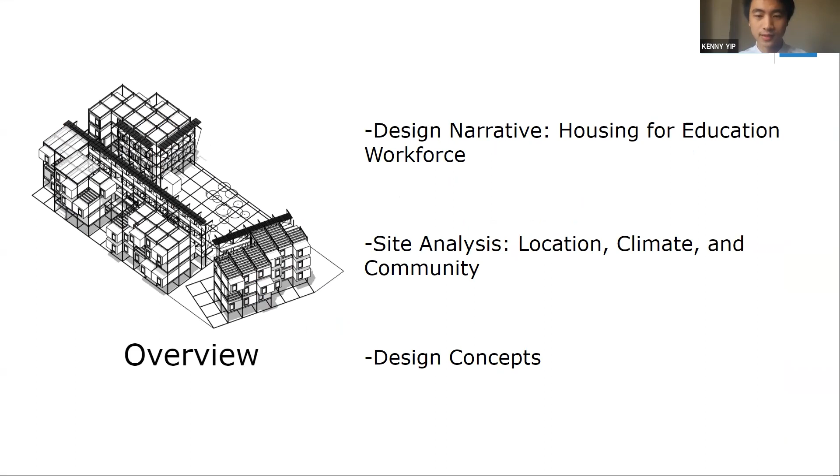Thank you very much. Hello everyone, we're UCLA Bruin Builders, and we are here to present our design proposal of Hollenbeck Village, located in the neighborhood of Boyle Heights, East Los Angeles. My name is Kenny, and here with me today are 4 other members of the team: Laura and Connor from architecture, and Sterling and Luca from the engineering team. We'll begin our presentation with an introduction of our design narratives, what drives our design, and transition into some of the site specifics, then conclude with aspects of the design that reflect the criteria outlined by the competition.

Some of the design goals we focused on for this project are shown here. We want this multifamily building to be affordable and bring together members of the community with attractive spaces. We want to achieve net zero with on-site renewable generation while also electrifying our technical systems. A modular approach gives simplified variability to the types of families that can live at Hollenbeck Village, and incorporating a passive design reduces energy use while taking advantage of the temperate Los Angeles climate.

In September of 2022, the governor of California signed AB 2295, the Education Workforce Housing Assembly Bill, which aims to build below market housing for teachers and other school employees on public school land. Thus, we chose an empty lot on the school grounds of Hollenbeck Middle School to develop our project. The lot is also located south of 2 other high schools and a continuation school, allowing our proposal to serve a larger pool of students, teachers, and school employees.

Guiding our design strategies in both the realm of architecture and engineering are the 2022 California Building Energy Efficiency Standards. We aimed, however, not to use these as simply guides, but to surpass them throughout our design.

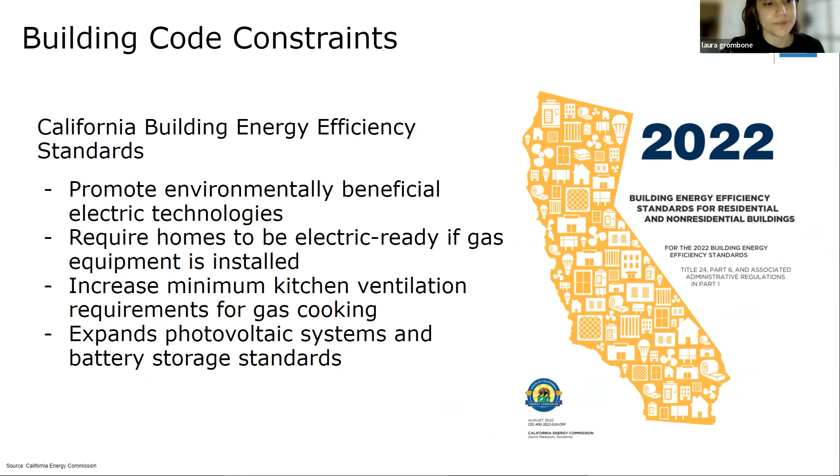So I want to take a moment to talk about our site analysis. We're located in a Mediterranean climate, so year-round we have a pretty consistent temperature. You can think of us as having a dry season and a wet season with a low yearly rainfall. We have an average humidity of about 60%.

Next, we're going to dive into some deeper details about our design concepts, starting with market analysis. After conducting a market analysis, we concluded that Boyle Heights is a predominantly low-income renter Latino neighborhood located east of downtown Los Angeles. Like most underprivileged neighborhoods in Los Angeles, Boyle Heights suffers from a chronic lack of affordable housing and access to green spaces. This is one of the reasons why housing affordability was a driving element in our design process.

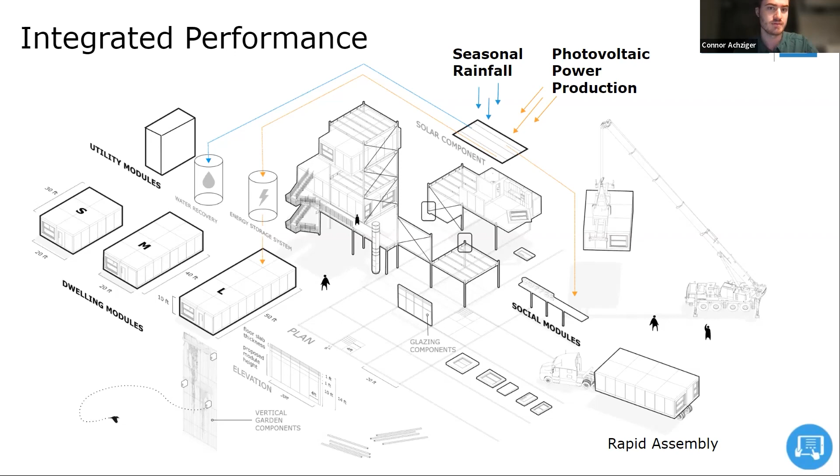Each of the 3 modules has 2 main components: a breezeway for passive cooling, which is consequential of 2 opposing large windows, and a utility corridor. Through this partial floor plan, we hope to highlight the way the modules can be combined, mirrored, and rotated for the optimization of shared plumbing walls.

As Connor discussed, we oriented our buildings to maximize the passive energy gains. We oriented towards the prevailing winds and put space between our modules and chose our window positions to enhance the cross ventilation, reducing cooling loads in the summer and the associated energy costs. The east to west modular orientation also takes advantage of natural lighting and passive heating in the cooler months.

We specified Energy Star certified appliances to conserve water and energy, and a decentralized HVAC system, giving occupants control over their own indoor temperatures. The modern open plan floor plan creates a luxurious feel and integrates the indoor and outdoor with each of the units.

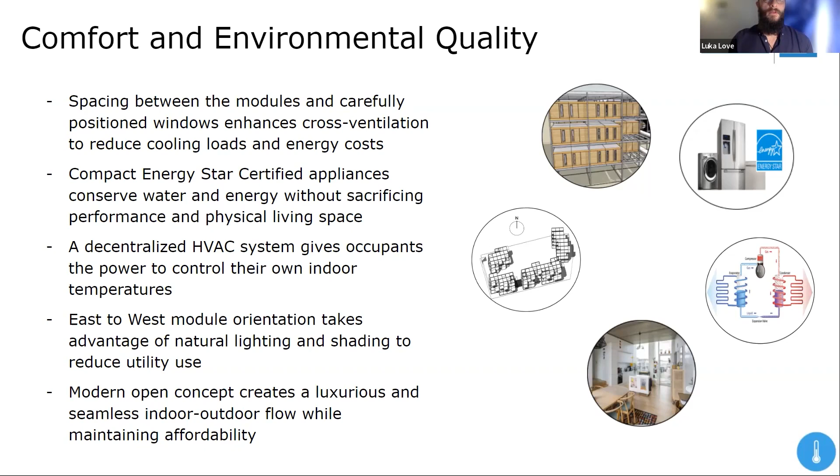Our primary building envelope material we chose was a 5-ply cross-laminated timber. We chose that for its sustainability and for its insulative properties. And on either side of that, a number of other layers of waterproofing and insulation to ensure a safe and secure building envelope that would remain relatively insulated throughout the year.

The primary structure is a structural steel framework, which each of these modules sits into, giving some flexibility in the orientation of the modules and how they're set up within the framework. We chose a variable refrigerant flow HVAC system that is able to serve multiple units, for the ease of access for maintenance down the line.

As Luca mentioned, there's a lot of flexibility in how we orient our modules. This allows us to position them in a way where upper units are shading the lower units during the summertime, but allowing solar heat gain in the winter when the sun is lower on the horizon.

We have a plan here to implement 40,000 square feet of drought-tolerant indigenous plants to support local pollinators and also increase biophilia. Here on this diagram as well, you can see we are collecting gray water through our sinks and showers, and we're collecting site water through our photovoltaics as well.

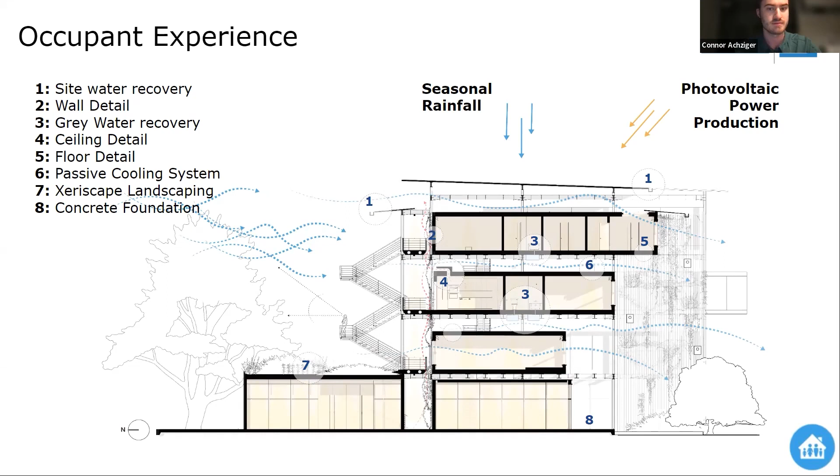Using PV Watts, we calculated the annual renewable energy production for a solar panel configuration that fully covers the rooftops of each block in the complex. Based on our preliminary open studio model, we have an estimated site EUI of just under 16 kBTUs per square foot. This suggests that for the total energy consumption of the building, we are achieving a net zero design, but it's worth mentioning that we're still working to introduce key technical components into our energy model.

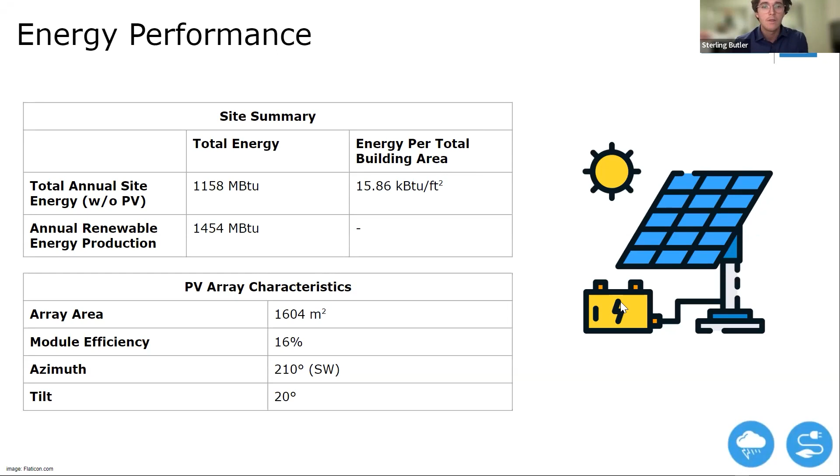This brings us to some of our goals ahead of the final submission. We want to create a more detailed energy model that not only incorporates our designed HVAC systems, but we also want to explore additional energy efficiency measures that optimize the building operations.

We're interested in utilizing battery storage in conjunction with on-site solar power, and we're still exploring the cost benefit and feasibility of other storage mechanisms outside of the conventional lithium-ion battery. In this context, battery storage can not only add resiliency to the community at Hollenbeck Village, but also to the nearby education facilities that may be relied on in the face of emergency or natural disaster.

We've made design decisions for the main mechanical, electrical, and plumbing equipment and fixtures. Going forward, we want to better understand how those utilities are distributed and how the different trades work with one another. With some of this additional detail, we want to revisit our life cycle assessment to include a more refined list of building components and materials, and also discuss alternatives to those that contain high embodied carbon. Lastly, we plan to continue iterating on the design as a whole and search for more inspiration within the team and hopefully industry sponsors in the future.

And with that, thank you for your time, and we're open to any comments or questions that you have now.

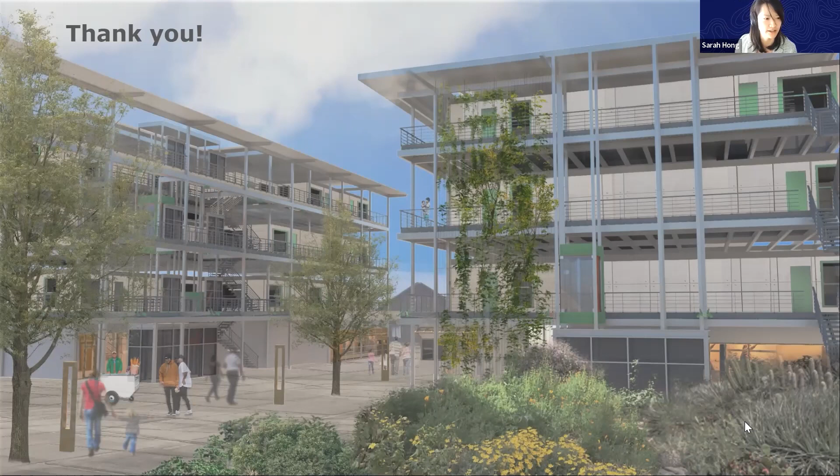Thank you for that. This project looks great. Your design goals are spot on. The project addresses a lot of critical issues that we're seeing today with affordable housing, walkability, it's community centered. I think that's great. It's also the rainwater capture is really important in a place like LA. The VRF system is also, I think, very appropriate for this climate. I have a couple of questions. One, I noticed the utility costs, even though you are in a very mild climate with a great system, the utility costs did seem a little bit high. Did you do an analysis of that?

Is most of that coming from plug loads or? Yeah, so the majority of that estimation was just based on the yearly energy consumption of some of the equipment itself. We still haven't, within our energy model, had the opportunity to introduce utility estimation costs from the area because we're still working on gathering that information, but that is something that we want to look to minimize with these energy efficiency measures that we are implementing.

Gotcha. Thanks. My second question is, were any climate risks considered in your design, either with the envelope or with the mechanical systems, particularly the risk of wildfire pollutants in the area and the impact on indoor air quality?

So the main risks that we were focusing on, at least initially, was the fact that the LA area lies pretty close to some large fault lines. Our structural system is designed to resist any severe earthquakes that may occur in the area, and with the building envelope, we do want to explore how we can also apply some type of fire rating to important systems, maybe on the ground floor, and also provide safe ways for our building occupants to get out of the area if they need to in time of fire. But that is definitely something we want to look at further. We also have that large grey water repository, which we have access to in the event of fires.

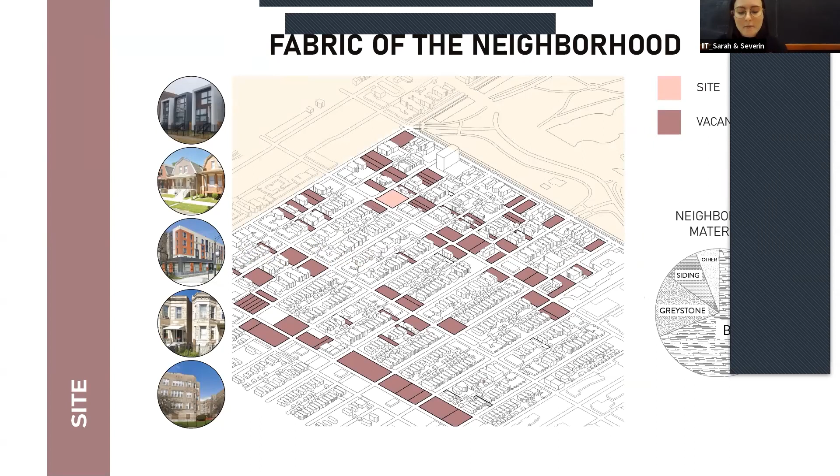At the beginning of the design process, we learned that our community stakeholders really want residential developments to feel inviting and familiar within the fabric of the neighborhood. So we studied the local architecture and found that most of the homes have a brick finish, and a common element is a bay window.

In its current state, our site is vacant and surrounded by a handful of vacant lots, and these vacancies interrupt residential and commercial streets. Knowing this, our design needs to reintegrate our site and surrounding vacant lots into the fabric of the neighborhood.

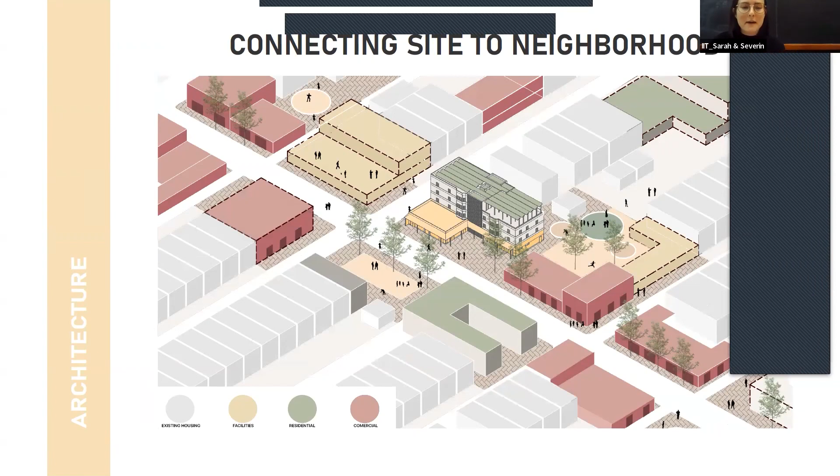Our proposal acts as a catalyst in reviving the 61st Street commercial corridor through the creation of pedestrian-friendly public spaces. As can be seen in the massing diagram, by pushing the residential floors away from the street, more space can be allocated for commercial program that activates the street.

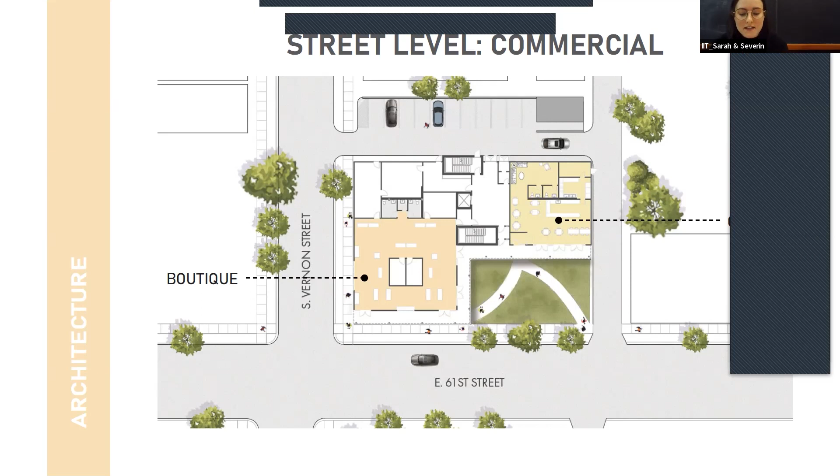As can be seen on the ground floor plan, the courtyard invites the public into the boutiques and the cafe. These commercial spaces also generate profit for the building, which is used to help lower costs and make it more affordable for residents who own homes within the building.

The residential floors feature two different types of units, owned and rented. The 3-bedroom and 2-bedroom units are owned, while the 1-bedroom units are rented. We designed these so that adjacent units can be merged into a 4-bedroom home if owners wish to expand.

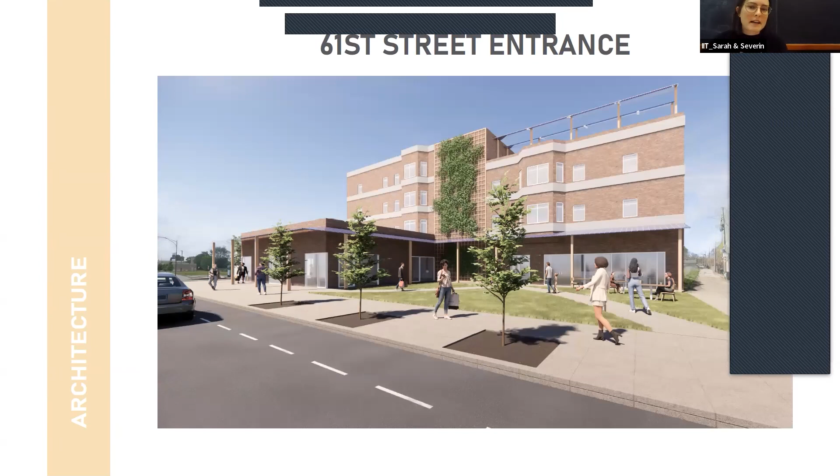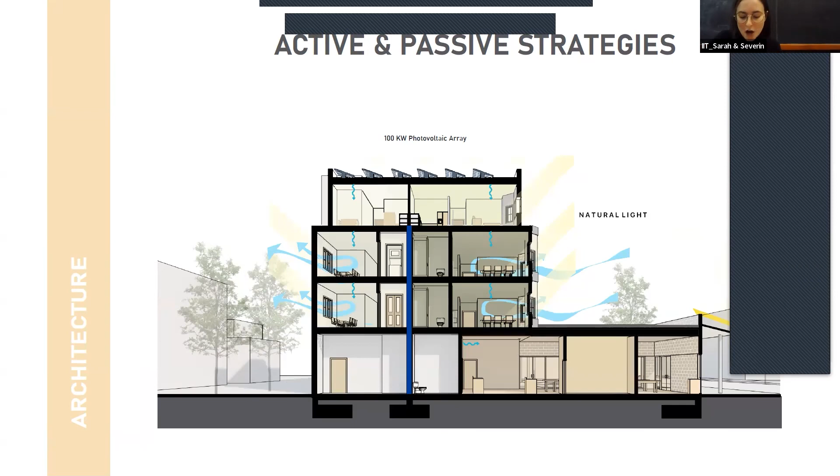Before we get into the energy analysis, we wanted to highlight the passive strategies that our building implements. Because we are located in a heating-dominated zone, our building is oriented along the east-west axis to maximize solar exposure and take advantage of natural daylighting. To minimize heat loss, our envelope is airtight, and additionally, each residential unit has operable windows and fans that can be used for thermal comfort.

Awesome, thank you very much, Sarah. My name is Severin. I'm going to be sharing our energy and engineering side of our project.

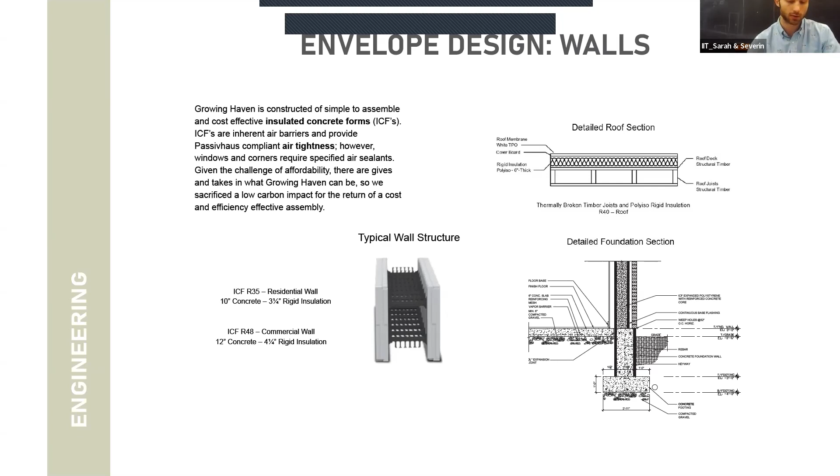Going through our envelope design, to accomplish our energy and affordability goals, we recognized that a sacrifice needed to be made somewhere. By accepting a lower LCA and avoiding a thermally broken wooden frame system, we opted for an insulated concrete form structure with low impact carbon concrete. This allows for an affordable construction method, a high quality insulated enclosure, and fewer zones where air leakage problems may occur.

For our residential HVAC and plumbing, the spaces are conditioned by roof mounted VRF systems and a dedicated outdoor air unit. The system is affordable and minimizes losses through short refrigerant lines. Additionally, heat pump hot water heaters are stored at each floor lobby to minimize sound transmission and maximize space use. For our commercial spaces, we primarily require our MEP systems to be running on a 12/7 schedule.

Given limited use and individual space needs, controllable wall-mounted ductless mini split air conditioners are provided throughout so that individual zones can be accommodated on an as-needed basis. Water heating supply is provided from a heat pump system with storage tanks located behind the boutique spaces. Additionally, the cafe kitchen hot water supply is provided by a SANCO2 tank and a heat pump system, which provides inherent cooling within the kitchen space and an ample amount of hot water supply.

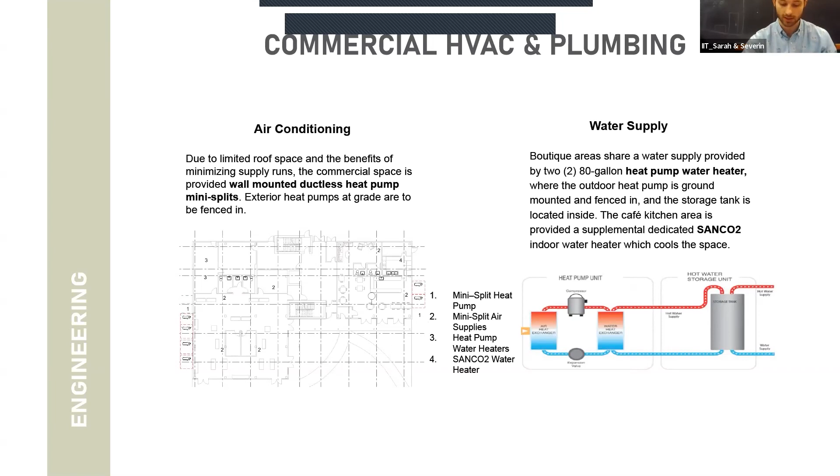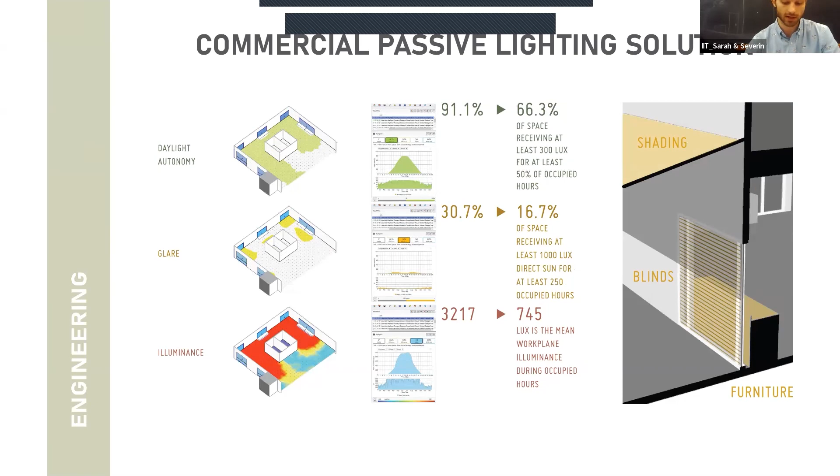Moving on to our PV system, there will be a 230 panel, 440 watt solar array, and a 100 kilowatt system. Each AC panel is fitted with a microinverter, allowing for decreased shading losses due to debris. The panels will be mounted on a fixed ballast system at a 30-degree angle facing south. Ideally, this system should produce close to 500 million BTU per year.

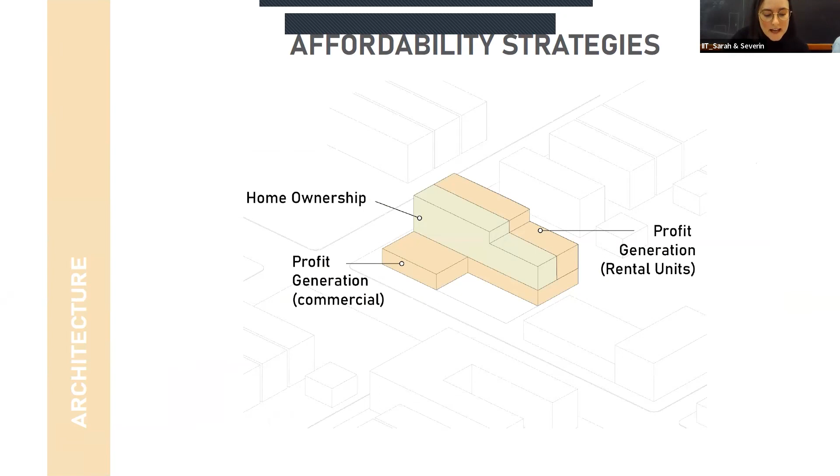Thank you, Severin. After our preliminary cost analysis, we found that we needed to implement additional strategies to make Growing Haven both net zero and affordable. Therefore, to offset the upfront construction cost, we created two affordability strategies. One strategy is that homeowners could purchase a rental unit on their floor and use it to generate income. The other strategy is to utilize the commercial boutique and cafe spaces to generate profit that will offset the maintenance cost for the entire building.

Additionally, we researched multiple grants, rebates, and subsidies, which can be a good option to help lower initial construction costs. Thank you so much for listening, and we'd like to thank our excellent teammates, industry partners, and wonderful faculty advisors.

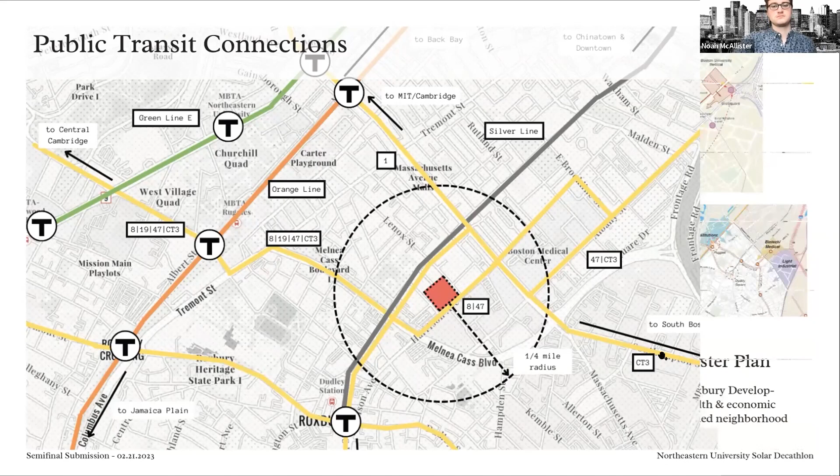Our site is broken down into 3 large residential blocks, as well as a cluster of townhomes. To start with, our east building, along with its residential space, also has retail commercial space, common areas for the residents, and a large expansion for Rosie's Place, which is the oldest women's shelter in the country, with both its administrative and operations located just adjacent to our site.

Our north building is our most dense residential building. It consists of mainly studio and 1-bedroom apartments, and it is an all residential building.

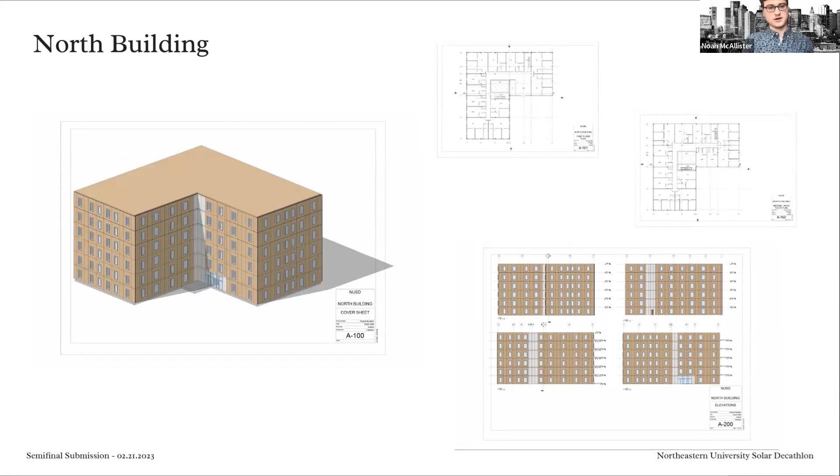Our west building is home to our largest commercial retail space. It also contains covered parking, a gym for the residents, and a green roof.

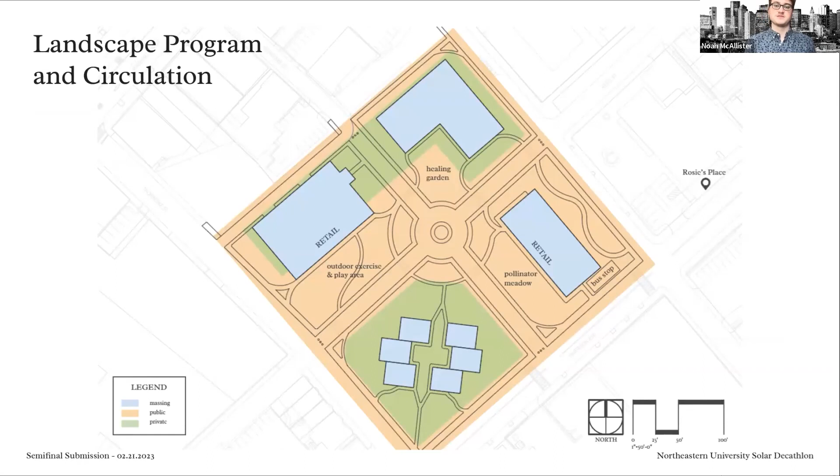One key design concern that was identified was trying to find and maintain a balance between private and public use of the site. This was done through the general layout of the massing, as well as specifically curated program for the site itself.

Going into more detail about our buildings, starting from the outside in, our facade is a rainscreen cladding system using 2 different materials, one being an Equitone fiber cement panel, the other being a charred white cypress wood panel.

Working with RDH Building Science, we've been trying to perfect our building enclosure to make sure it's not only energy efficient, but also easily constructible and free of any headaches on the general contractor's end. We've adopted a modular EIFS wall panel system with a 3-ply CLT backup wall, as well as a semi-permeable and semi-rigid insulation, which allows water to outwardly dry.

We also have a proper air and water barrier. We hope that this system is not only easily constructible for installation, but it also avoids any potential water penetration of the CLT members in the construction process.

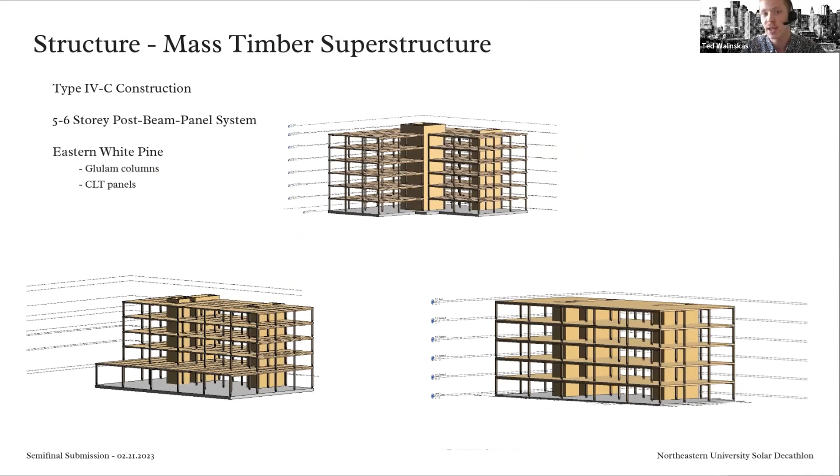For our structural systems, we are using a post beam and panel system for our 3 main buildings, along with general wood framing on our south townhomes. This system allows us to buy all of our structural members in bulk, and with the post and beam system, we are allowed to have various spans of various lengths to match our different unit sizes, as well as our modular wall panels themselves.

For the MEP systems, there were several selections made to promote energy efficiency. Our main criteria for selection were energy efficiency, durability, and price, respectively. To start, an important selection came with the HVAC systems. We are planning on using metered heat exchangers along with heat recovery ventilation to ensure that efficient and effective heating will be supplied to the building.

For our electrical systems, we are observing several incentives such as Mass Save and Clean Peaks, given by Eversource and the state of Massachusetts, respectively, to promote load reduction on the grid by buying energy back from on-site production. With this design, we will be connecting all of our buildings with a virtual power plant.

All 4 of our buildings will have on-site solar production and storage of at least 10 kilowatt hours per unit, and will be connected through SPAN smart panels. Each of these buildings will be connected so as to reduce the reliance on the grid, along with being able to sell back power to the grid as production goes beyond demand.

To create the most energy efficient envelope, several design iterations have been worked through. We began with the box model and have been working through energy models along with different design iterations to create an efficient envelope. We are still working through this process.

Due to an unfortunate error in our submissions, our carbon emissions and utility costs were overlooked. The total carbon emissions for these 3 buildings would be 319 tons per year. This number was generated using the nationwide average of 0.818 pounds of carbon per kilowatt hour.

This number would be much lower as further energy efficiency is implemented, on-site storage is accounted for, and the true emissions of energy pulled from the grid are accounted for.

The total utility cost for this building per month would be at maximum $10,500. This value would be greatly reduced as the energy model is refined, energy buyback is completely accounted for, and the aforementioned incentives are applied.

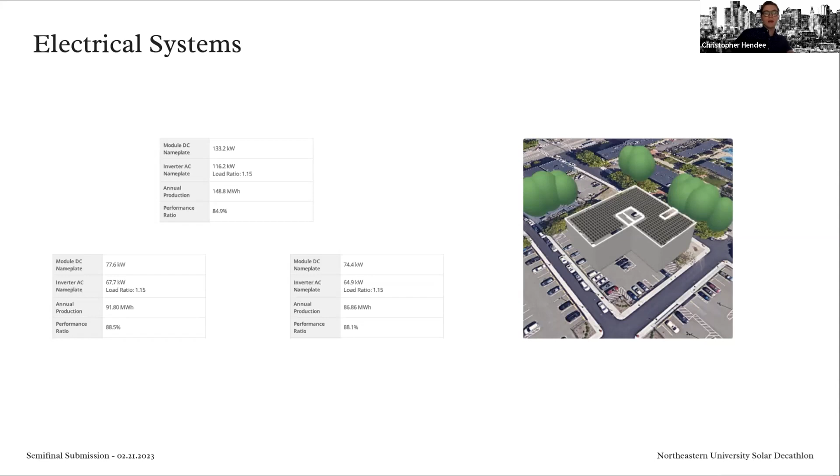With respect to the plumbing systems, we have decided to use tanked electric water heaters along with thermodrain heat recovery. With the use of thermodrain heat recovery, it is predicted that under conservative estimates, it will reduce the load on each hot water heater by 25%. All of our fixture selections were made with reduced water use in mind.

As mentioned, our site is also home to a collection of townhomes. There will be a total of 18 3-bedroom units in these homes, designed with the young family in mind. This will create a family-oriented community within the larger Cardinal Plaza community and the neighborhood of Roxbury. The more precise plans and layout of these units are still in development.

If you talk to any developer in Boston, you know that it's hard for things to be approved, which is why it was a priority for us to actually design something that could be built in the city. Because our site is so large, encompassing multiple streets, we would be in what's known as a planned development area, or a PDA. We've already started considering how this PDA would be approved by the city, and additionally, what review elements were considered for each individual building.

For our north building, as it's over 50,000 square feet, it would go into Article 80B, known as intensive large project review. This has additional measures we have to consider, such as being LEED Gold and meeting 1.25-inch stormwater retention.

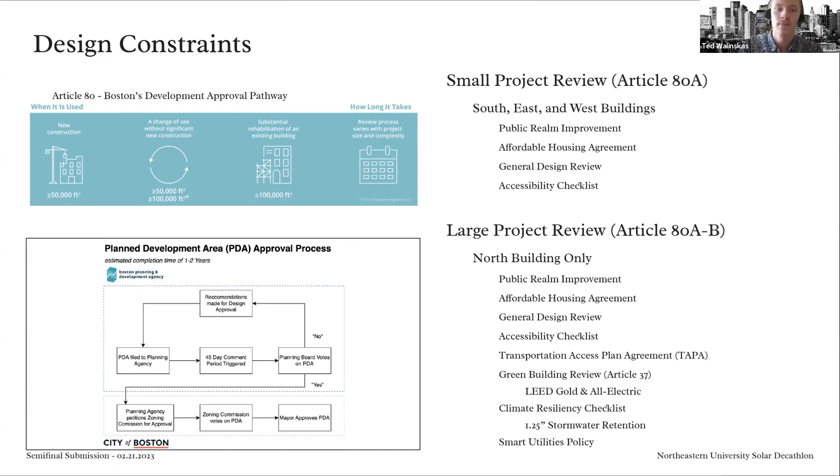It's also no secret that Boston is expensive, recently surpassing San Francisco to be America's 2nd most expensive city to rent 1-beds, studios, and most general unit combinations in. Using our own experiences from our ongoing build competition, we were able to create an in-house tool to compare and analyze different affordability ranges for our site.

For our north building, we have a dense array of studio and 1-beds being sold at market rate. And using the surplus we have from the sellback, we were able to subsidize our east and west buildings with a large amount of affordable units, all the way down to 30 and 50 percent of the area median income, which can be considered deeply affordable.

This is able to supply a lot of market rate units for the booming population of young professionals, particularly in the biotech and medical spaces, while also supplying units for the long queue of longtime residents in the city who need these income restricted housing stock.

We've had a large change in design in the past month, but now what we're working on, we believe, is a strong foundation for our project. We'll be moving forward to perfect it and add more detail on all the different categories.

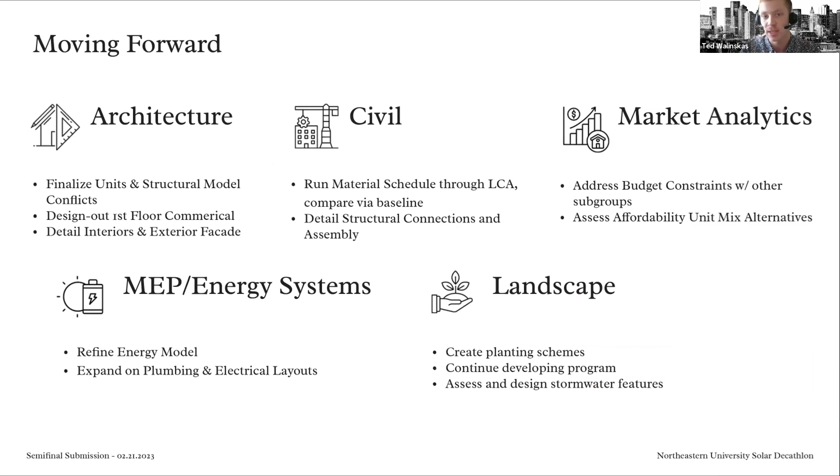Thank you, guys. Can you tell me more about what you're doing for the HVAC design? What's your system selection for space heating and cooling? So for our systems, we are planning on using air source heat pumps. We've been looking into the Lennox systems, primarily due to their performance with cold climates.

Great. And then for the domestic hot water, you mentioned drain heat recovery. I think that's great. Is this being paired with a gas or an electric water heater? Electric water heater. Gotcha.

I really like the analysis about the market, but tell me a little more about the demographic of the market for this project. Yes, so our neighborhood is really dynamic. It is a very dense neighborhood. We're on the verge of South End and Roxbury, and specifically, there is a large working class population. There is a lot of public housing around our neighborhood, as well as general market rate brownstones. So there's a large class disparity within the neighborhood, which is why we need a lot more of what's considered the missing middle in Boston. And in particular, on the higher end of that missing middle, we need more basic, smaller studios and one-beds to meet the growing student population in the area. We have our university nearby, as well as Boston Medical Center, which has a lot of medical students and students on residency who aren't able to afford a lot of these really high-end luxury developments around the hospital.

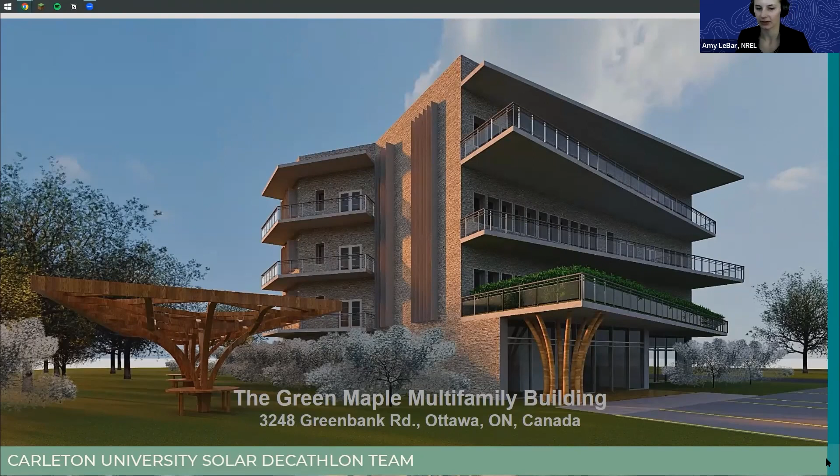Okay, good morning. I'm Isaac. Ali, Ilyas, are you here too? Yep, I'm here. Sounds good, audio is clear.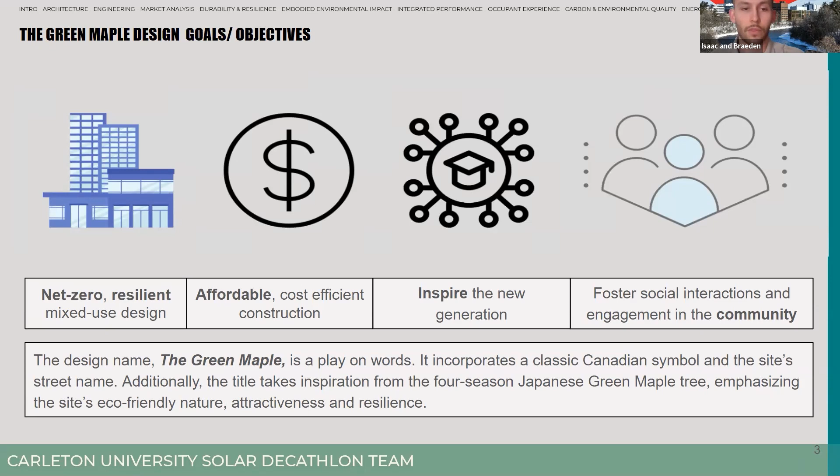Our third goal was to inspire the next generation of developers. Through our research, we didn't find much in the way of developers demonstrating effective long-term net zero construction, so we want to change that in the community. And lastly, we wanted to create and foster community interactions through social engagement and safe environments.

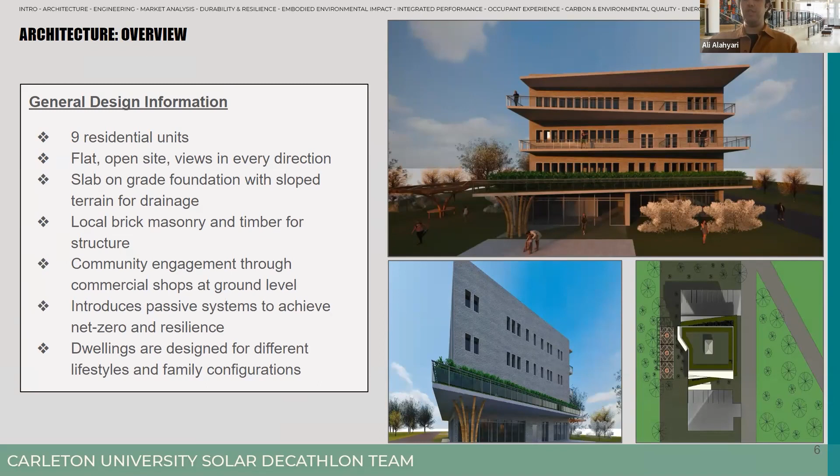For the architecture, based on our design goals, we went through different design iterations to find the best possible form, layout, and materials. As you can see from the figures, the site is a flat, open site with views in every direction. Local brick masonry and timber will be used for the structure. Passive systems such as side fins, rainwater collectors, and ground source heat pumps were all introduced to achieve net zero and resiliency, which will be explained further in the presentation.

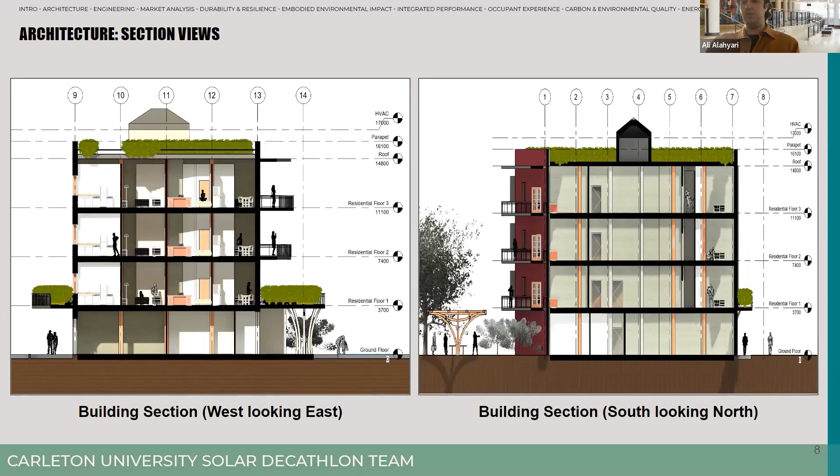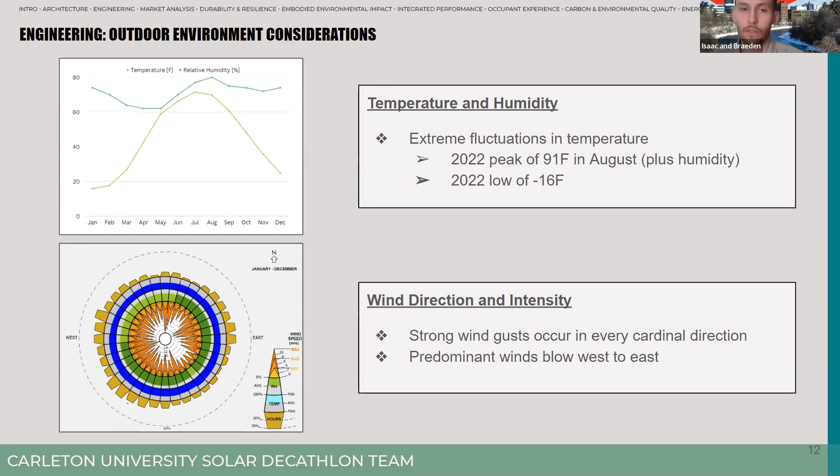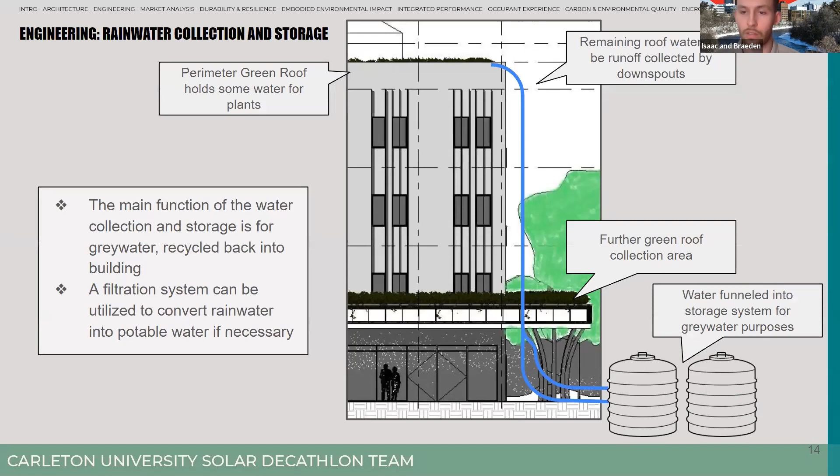Another design solution we considered was the rainwater collection system. A portion of the water is absorbed into the green roof, but the remaining runoff is collected into cisterns that can be used for gray water systems, such as toilets. In the case of a power outage, filters can be utilized to convert this gray water into potable water for drinking or showering.

For the market analysis, we calculated an initial investment of $8.7 million, broken down into 4 phases: site and construction, PV and mechanical systems, exterior and interior finishes.

We found an affordable rent price of $2,500 based on the average median household income. We also took an average commercial lease for the Barrhaven area at $52 per square foot. As a rule of thumb, 1% of the property value was used for the annual operating and maintenance costs. With this data, we got a payback period for the initial investment of 29 years.

For durability and resilience, we modeled the building's energy systems for the most energy-intensive week of the year. We designed the system, in the event of a power outage, to have enough battery storage while charging and discharging with photovoltaics to be resilient over the course of that week.

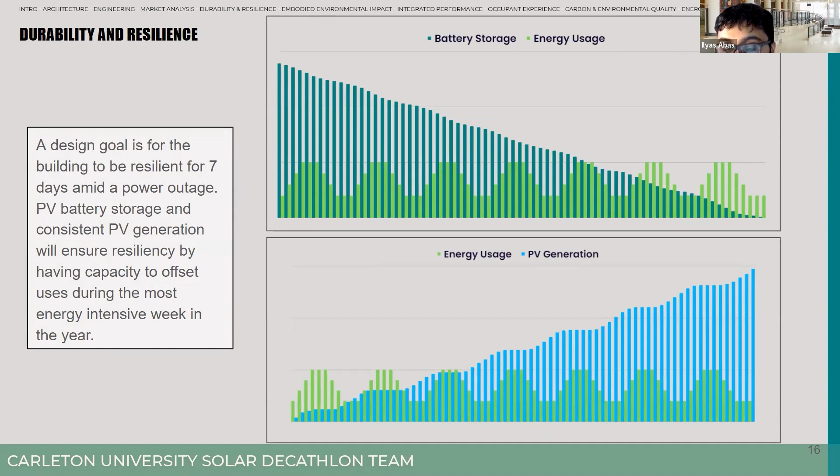For embodied environmental impacts, we focused on wood frame construction, locally sourced masonry bricks, no use of natural gas, and an on-site renewable energy system.

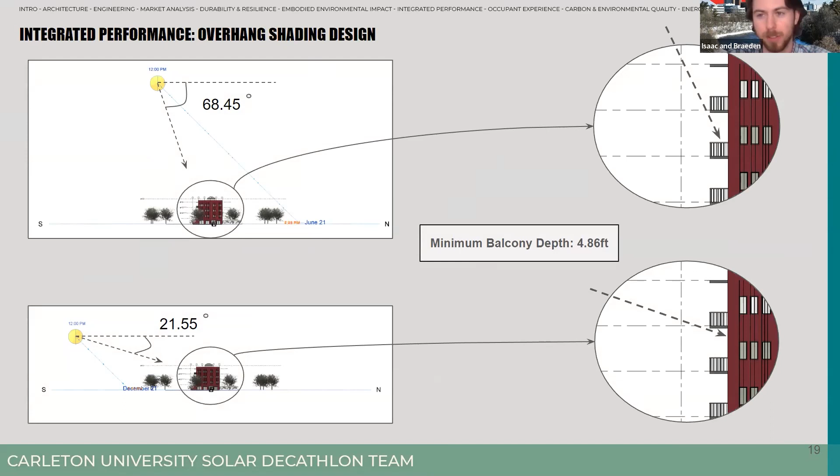Based on the Ottawa latitude, overhangs were designed to completely shade south-facing windows in the summer and allow all solar heat gains in the winter. Side fins were incorporated on the east and west facades of the building. They ensure that there's shade after 10 a.m. in the east and until 2 p.m. in the west.

As far as pleasing occupants goes, there's lots of green space in the surrounding area. Bedrooms are distant from elevators, so disruptions won't occur. Living rooms are all on the south facade of the building, meaning more sun is provided to the occupants. Stairwells are designed to ensure proper egress.

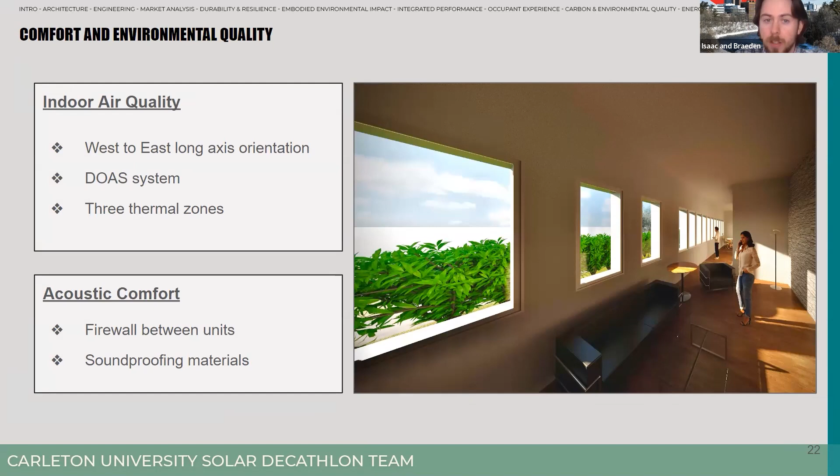A main comfort design of the building was to include the 4 categories of indoor environmental quality, which incorporates extraordinary indoor air quality, provides acoustic comfort through soundproofing, and overhangs and side fins provide visual comfort to the occupant. Since Ottawa is in an extreme climate, excellent thermal resistance is provided, as well as operable windows in the summertime, giving occupants a sense of control which ultimately makes them more satisfied.

The energy modeling process began with software such as eQuest, then Energy Plus, which eventually moved to Design Builder, which is where we found our successful results.

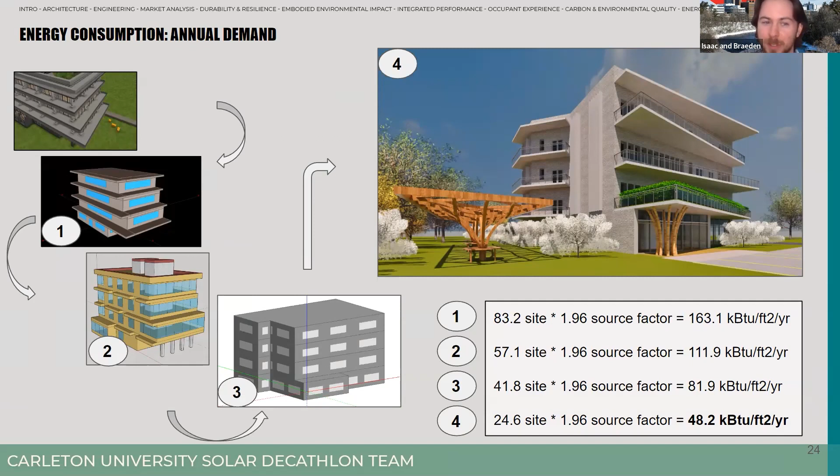Using an applicable site-to-source factor for electricity for the region, an energy usage of 48.2 kBtu per square foot per year was found, which is less than the solar decathlon requirement.

As said before, we're in a predominantly heating climate, so roughly 60% of the energy use goes to space heating. PV generation is more than sufficient to counter the energy uses for 8 months of the year, in which the extra energy will be sent back to the grid.

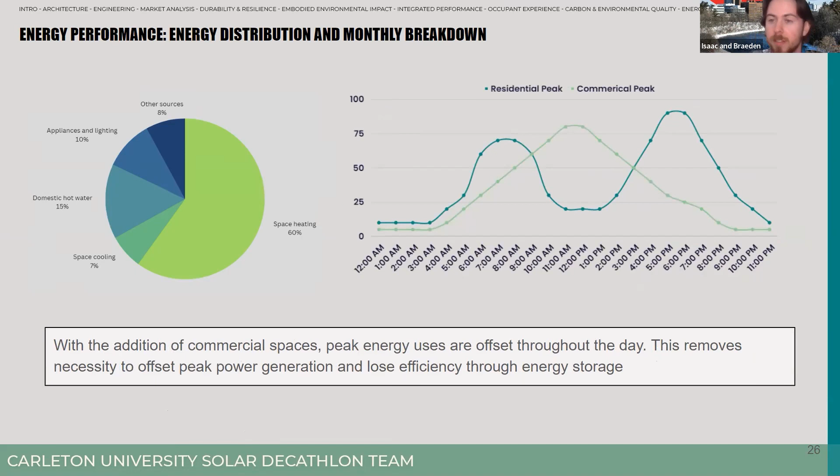For 4 months, though, in the colder, more energy-intensive months, it'll be required that electricity be used from the grid. With the addition of commercial space on the first floor, peak energy times can be offset to limit efficiency losses through energy storage. We want to thank you for your time and ask if you have any questions.

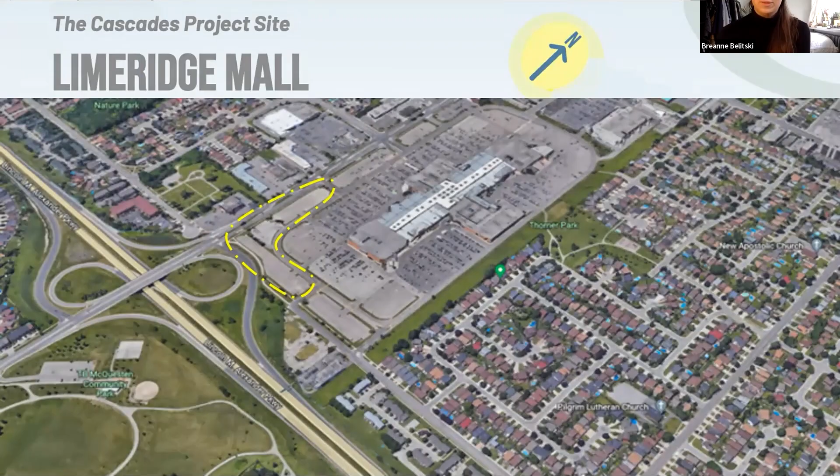Our building, dubbed the Cascades, references the waterfalls of Hamilton by utilizing stepped architecture that cascades downwards towards the south, thereby allowing maximum daylighting into the units. The building is crowned with a wave of hybrid solar thermal panels, which offers benefits from its equatorial orientation and generates as much power as the building requires.

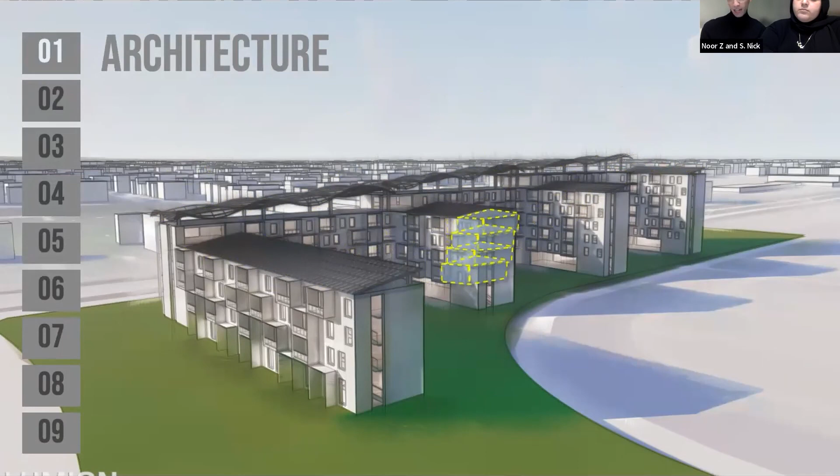The units are designed as modular and prefabricated, which offers many benefits, one of which being a unique scalability of our design for many lot sizes. Lastly, the courtyards and breezeways offer spaces for play, relaxation, and community connection.

The Cascades energy strategy is to provide a high-performance envelope that reduces thermal energy transfer and air infiltration through the walls, roof, floor, and windows. The envelope will be detailed to reduce thermal bridging and allow high R-value assemblies, such as R32.5 effective walls. This will ensure that occupants of the Cascades will be comfortable in Hamilton's cold climate.

A hybrid solar thermal panel array at the roof level of the building will provide all heating, domestic hot water, and electrical demand for the Cascades residents, generating a potential of 454 kilowatts of on-site electrical power. The low TEDI approach allows us to utilize highly efficient mechanical equipment, such as the solar thermal panels distributed by a radiant floor heating system, cooling provided by an air-to-water heat pump tied to in-suite fan coil units, all powered by on-site renewable electricity. Prefabrication of the modular units will minimize construction duration, reduce waste, and provide high-quality control.

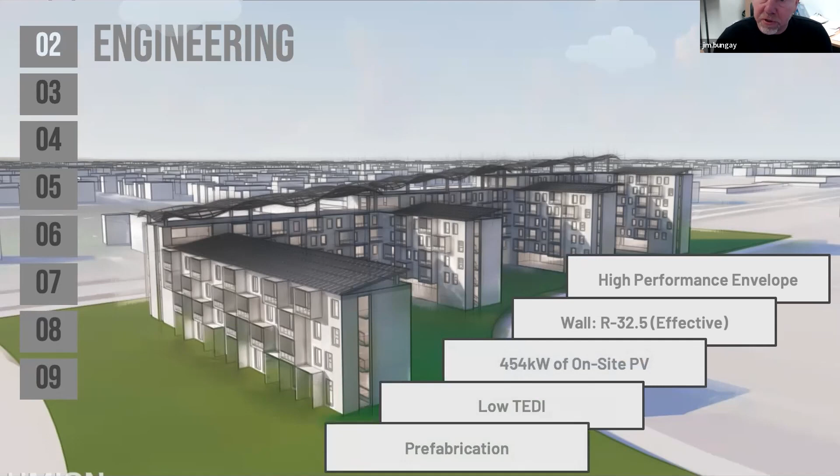The goal of the Cascades development is to provide affordable and high-performance housing to a maximum number of people. Our model is a cooperative housing complex that aims to set rates which align with median incomes for the area. The unit costing is based on actual construction costs rather than a market-driven value.

Occupants in the typical market-driven housing spend higher percentages of their income on housing utilities, resulting in less available income for savings, food, etc. Our model provides affordability with a high-performance envelope, so occupants of the Cascades spend less of their income on housing utilities, leaving more available for discretionary savings and spending.

Several strategies act to ensure the durability of materials and systems that go into the Cascades. Materials used in construction will be chosen for their longevity, with a service life to match the age of the building. A WUFI hygrothermal analysis will ensure long-term durability of the building envelope. Passive design strategies and on-site electric storage will ensure occupant comfort during short-term power losses. Water collection and storage will ensure water security and reduce reliance on the municipal systems.

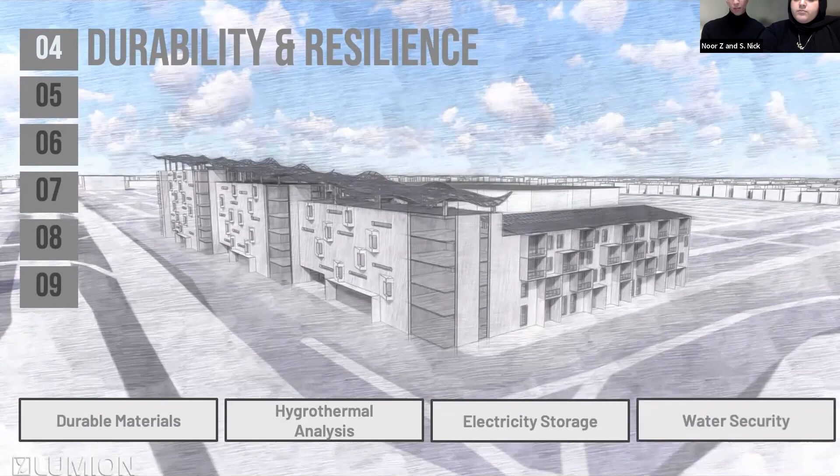Our approach to reducing embodied carbon at the Cascades begins with modular construction. Modularity and manufacturing offsite increases build quality, reduces waste, increases on-site construction efficiency, all leading to a reduced embodied carbon impact. Each module will be constructed of mass timber elements and clad with fiberboard insulation, which each have significantly reduced embodied carbon as compared to their traditional steel, concrete, and XPS counterparts. These products also have the added benefit of sequestering carbon for the lifespan of the building.

Where concrete is required, high supplementary cementitious materials, fiber reinforcement, or high recycled content rebar, and 50+ day cure times will be employed. The Cascades will make use of recycled content to the furthest extent possible and will be zero carbon certified through the CAGBC.

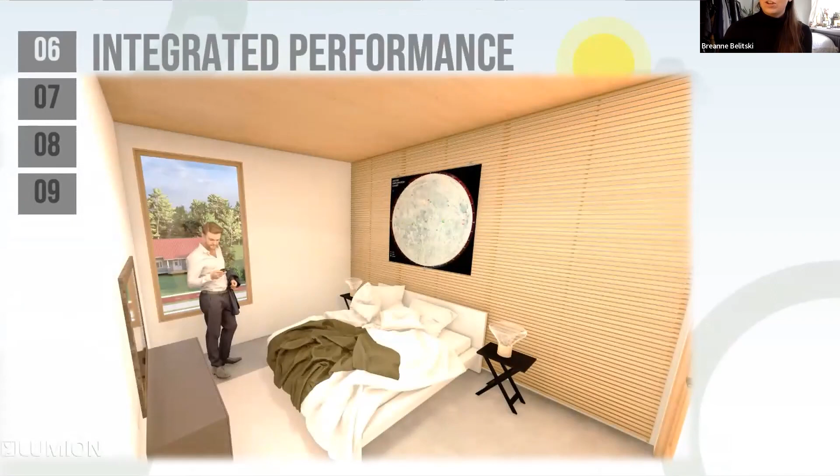In addition to the physical systems which contribute to energy efficiency, community-oriented technologies such as smartphone apps and smart touchscreens will inform residents of the energy performance of the building. Access to this information will involve the occupants in the Net Zero initiative, which will contribute to energy demand reduction.

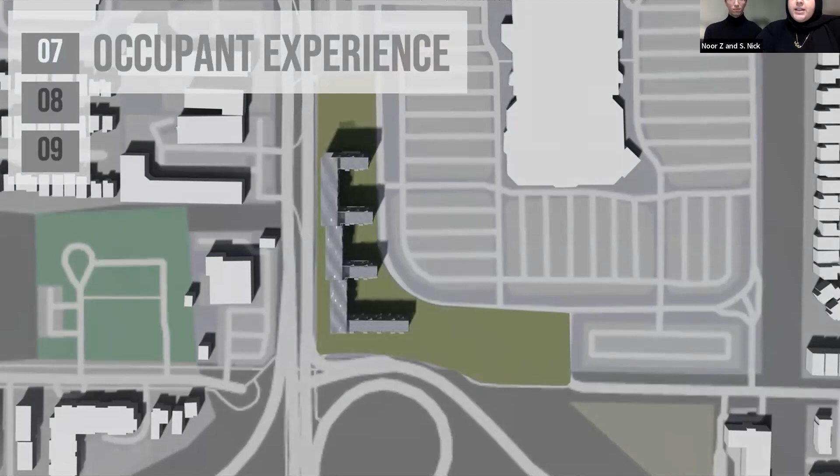In each unit, natural materials, functional layouts, and interior daylighting will improve the occupant experience at the Cascades. But now we want to go beyond the unit itself and tell you about the building's shared spaces in connection to the wider community.

Our building is designed for anyone who needs affordable housing. Rooftop patios, indoor amenities, and breezeways and courtyards offer space for families to play, individuals to meet and relax, and encourages connections with neighbors.

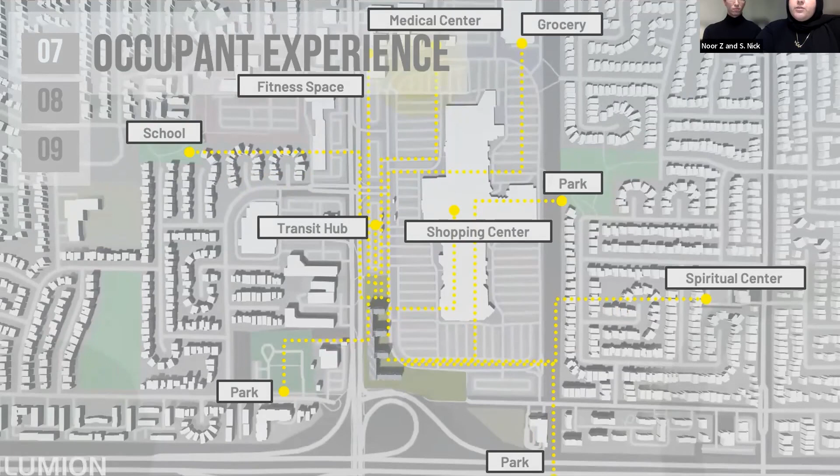Located in an already developed area, the site is well connected to the larger community. Transit routes, grocery stores, medical centers, gyms, shops, and parks are all within a mile of the building.

One of the most important strategies we have employed to achieve a comfortable indoor environment is an emphasis on daylighting through thoughtful window to wall ratios, building orientation, and stepped architecture.

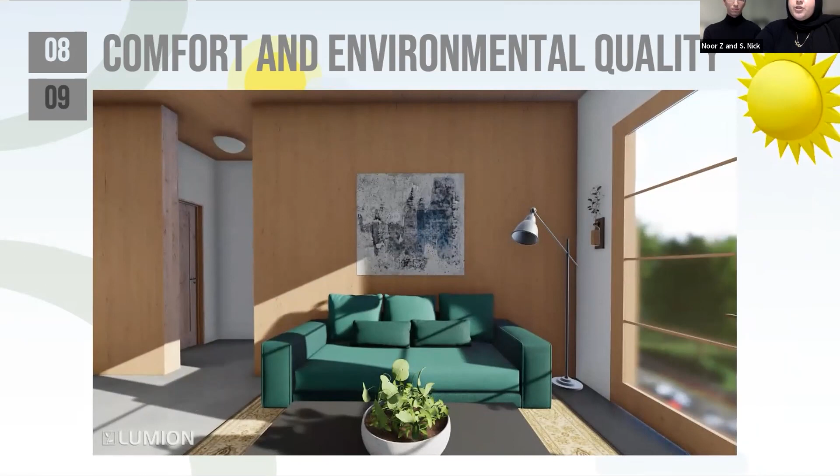Energy conservation measures that will be implemented to reduce our energy demands include reductions in thermal energy through the use of solar thermal panels, air source heat pumps, and energy recovery ventilators, each in combination with our optimized building envelope.

LED lighting systems synchronized with outdoor daylighting conditions and energy efficient appliances will reduce our overall lighting and plug loads. And finally, a building automation system paired with active sensors will identify additional operational schedule efficiencies within the building.

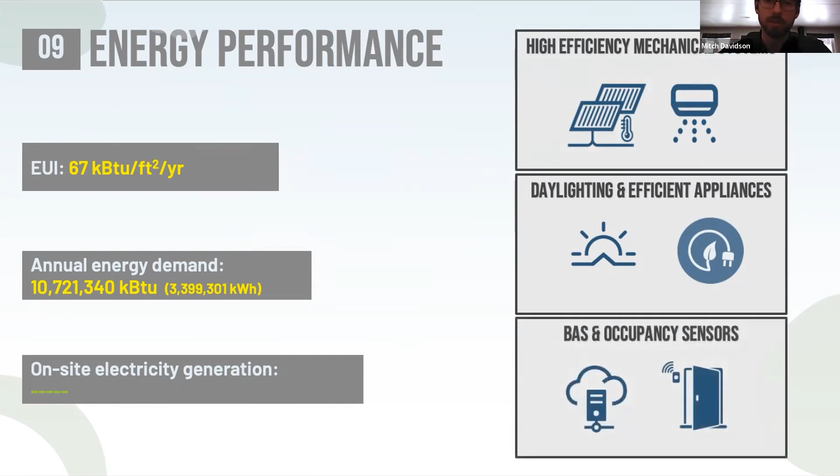Through this process, we hope to achieve an energy use intensity of 19 kilobtu per foot square per year or lower, prior to the consideration of on-site energy.

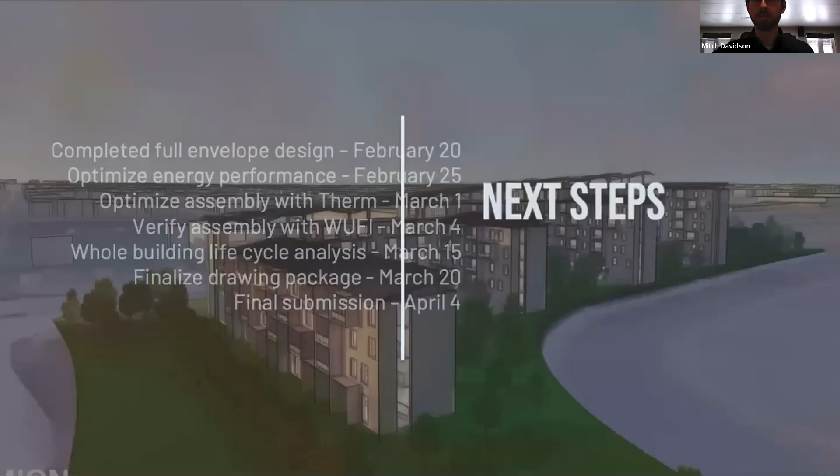I can take that one on. Yeah, so the waveform isn't necessarily based on any reference architecture that we have, but our professor does have a building, one of the educational facilities, that has a suspended array over the building. So if there were substantial losses from the waveform, we could sacrifice some of that massing to get the efficiencies we need, so it would be more sloped towards the south and flatter, et cetera. But we would have to look into how we could optimize the design for that.

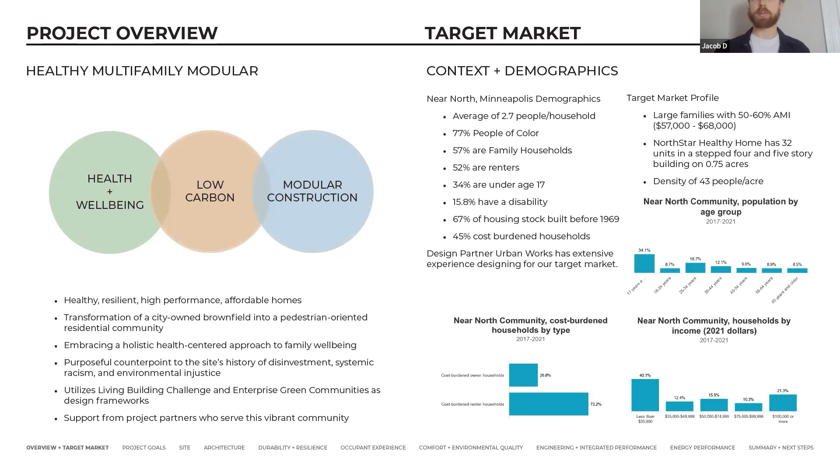When it comes to multifamily housing, we believe human and ecological health comes first. Our design goals are driven by a commitment to a non-toxic, low-carbon material criteria that incorporates trauma-informed design and biophilic principles. Volumetric modular construction supports our vision for high indoor environmental quality by allowing us to ensure the highest degree of control and consistency throughout construction. We hope to go beyond net zero performance by providing a valuable addition to the community of North Minneapolis.

Our site is a historically redlined residential area that has been further isolated by the development of highways to the north and east. Despite those challenges, there's a rich variety of parks, schools, cultural centers, and public transit, all within a half-mile radius of the site.

Being climate zone 6, we experience 110-degree temperature swings from hot, humid summers to very cold winters. We are familiar with the unique needs of a harsh climate and will continue to work with our modular manufacturing partners at RISE to design a building that is resilient and climate appropriate.

As part of a larger master plan for the site, we use modular construction as a prototype to create a community of spaces for families to live, play, and grow together. We're creating a residential scale multifamily building that responds to the existing character of the neighborhood by offsetting and clustering modules.

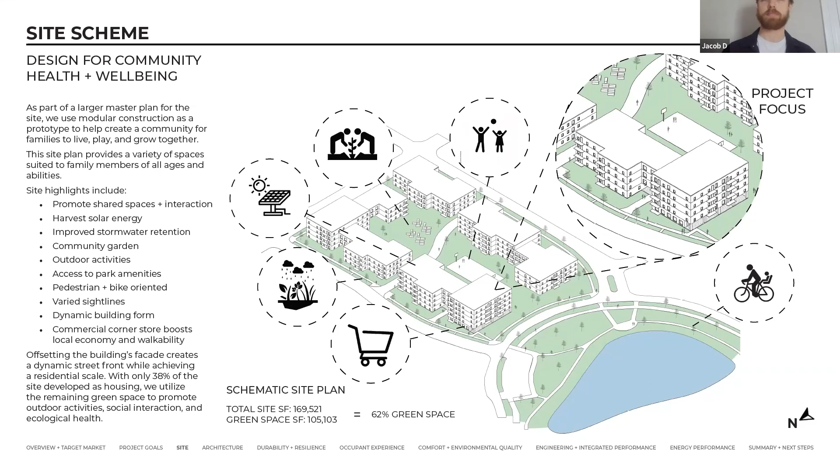Our building is made up of 96 prefabricated wood frame modules, each certified for installation under the state of Minnesota's code. Each module is 12 feet wide, 64 feet long, and 13 feet high, allowing us to transport modules to the site without the need for a special permit.

Modular construction is often stereotyped as architecturally restrictive and boring, but we believe our project demonstrates how modules can create an appealing living environment that performs better than traditional buildings while blending in with what exists. By offsetting modules, we create a variety of spatial layouts, sightlines, and a dynamic building form that supports an occupancy of 227. The first floor has a commercial corner store supported by a CLT podium and a breezeway to boost site access. Each floor above that is primarily residential with a community space located above the breezeway that serves as a flexible space for residents to share and build relationships.

We will be using a precast concrete foundation with 2x8 wall construction for the modular portion of the building and an inverted flat roof. The foundation will have rigid insulation on the outside of the water, vapor, and air control layer with a robust drainage system surrounding that foundation.

The 2x8 framed walls will be a hybrid wall system featuring exterior insulation with cladding that can drain and dry. The flat roof will have an EPDM membrane under rigid insulation and ballast.

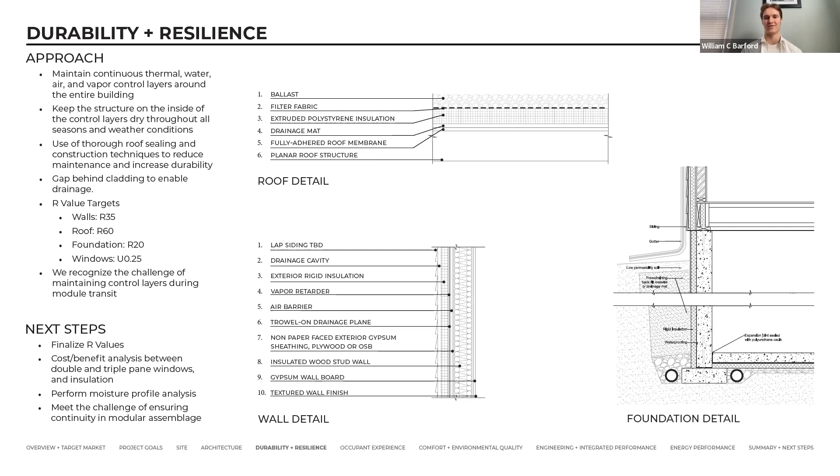This use of foundation insulation and control layers will lead to a continuous thermal, water, air, and vapor envelope around the entire building. Creating this continuity will lead to superior moisture management and little heat exchange. This will be challenging with prefabricated systems and modular construction, but it is something we will look into and continue to solve.

The focus of our occupant experience is rooted in the health and well-being of the residents. By using nature-based color palettes, we can integrate biophilic strategies and trauma-informed design principles that respond to the needs and experiences of our target market. Each unit supports the needs of a growing family by providing flexible spaces, lots of storage, and resident-controlled systems.

Building on our ideas about occupant experience, our focus on comfort and environmental quality takes us from design principles into application. We're using toxicity, global warming potential, circularity, and third-party certifications as our criteria for material choices.

Modular construction combined with our building control layers yield tight interior and exterior acoustics and odor separation, reduces moisture, and increases thermal comfort. Each home is fitted with individualized thermal controls and spot ventilation in the kitchen and bathroom, as well as makeup air.

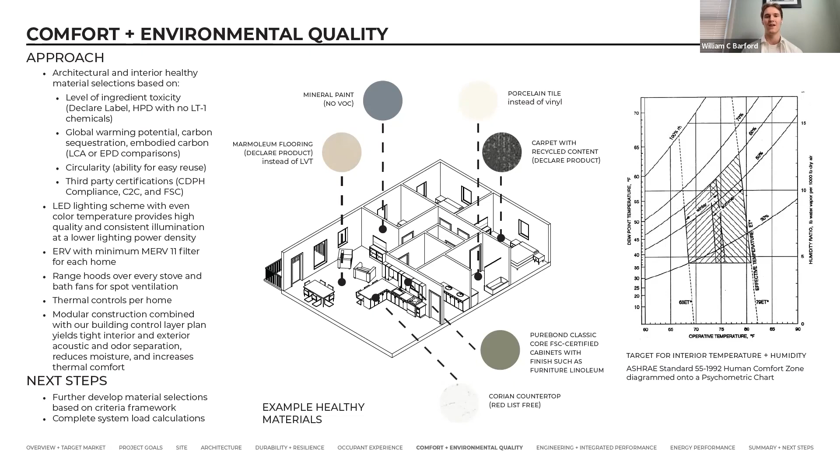Currently, we are looking into implementing a ground source heat pump to provide air conditioning and hot water, as well as an air to water or air to air heat pump. The ventilation system will be balanced using an ERV and a MERV 11 filter at minimum. This will filter out harmful particles as well as unwanted smells.

When it comes to structural loading, instead of the primary structure being the facade and corridor of the building, the loads are carried by the shear walls.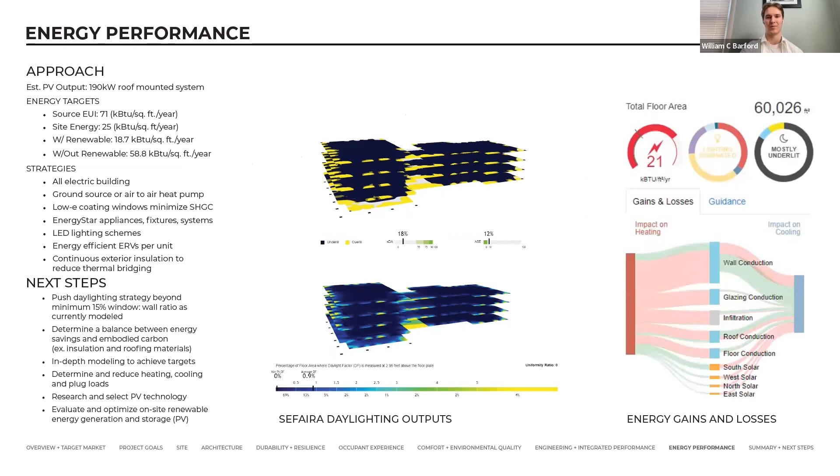We are currently using Sefaira and PVWatts as a starting point for our energy modeling. With a low window to wall ratio of 15% and high building performance EUI of 21, we see a lot of opportunity for improving daylighting while balancing energy use. Roof mounted PV is limited, but can provide an estimated 60% of building electricity. Having an all-electric building allows us to explore opportunities for off-site renewable energy to reach net zero.

All in all, we are proposing a family-oriented, healthy living environment that seeks to go beyond net zero performance while responding to the needs and experiences of a unique neighborhood in Minneapolis, Minnesota. Volumetric modular construction will enable a higher degree of control that is cost-effective, minimizes waste, and facilitates a high-performance design that champions excellent indoor environmental quality. We recognize that cost estimating and a full life cycle analysis of building materials is going to be a fun challenge. With the help of our industry partners, we are looking forward to the next steps.

Thank you for this opportunity to present. We are happy to answer any of your questions.

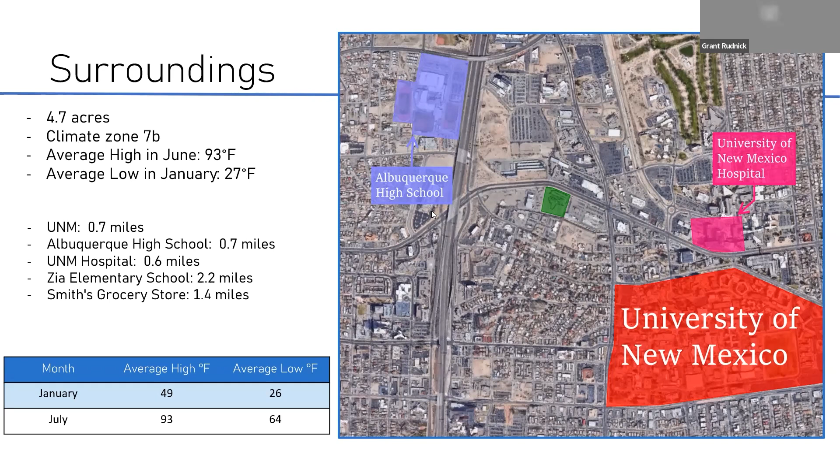So our site is divided off into 4 main buildings. We have 3 residential buildings and a grocery store. It also makes a lot of space for multi-use ground level space, things like a basketball court, a park, a barbecue area. We've tried to make good use of the property, which is about 4 acres.

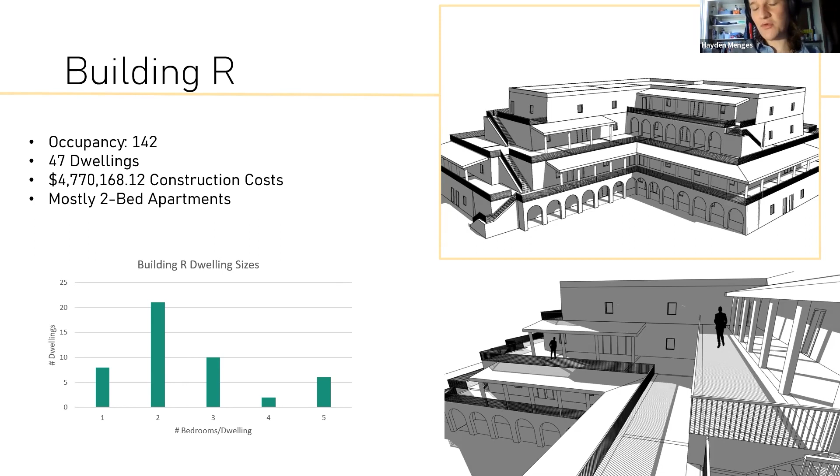Okay, so building R is our mid-sized building. It's got a reasonable occupancy of about 140 people, with dwellings that mostly skew towards the 2-bedroom area. This tunes it towards being optimal for maybe very small families, new couples, young adults, or people with roommates. A feature of all of our buildings is these nice, enormous flat roofs for solar space, and this one in particular has 7,000 square feet. It also has a terraced design that allows for lots of multi-use deck area elevated off the ground.

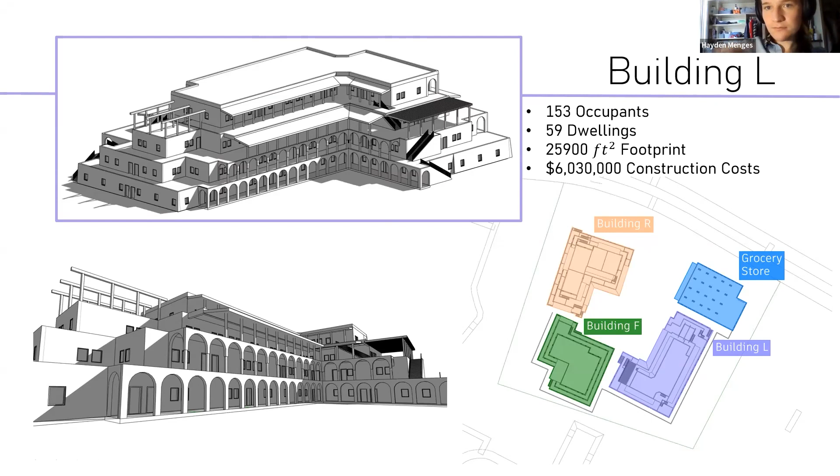This is exemplified a little more in building L, which takes the deck area and applies more shading to it on most surfaces. Building L is also our largest building, and it's the best example of things like our deck gardens and our elevated multi-use space. You can see we have partial shade from pergolas, but then full shade on most of the building.

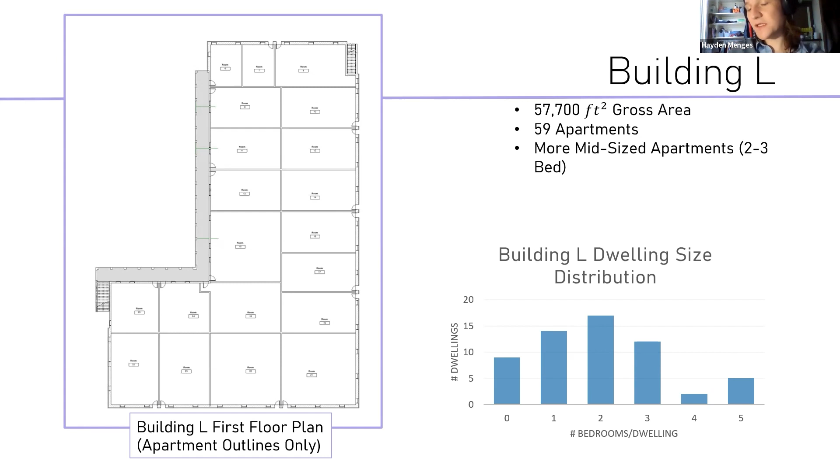As an example of how our buildings are divided up, we have 59 apartments in this building, distributed mostly toward the 1 to 3 bedroom range, which optimizes it for single people and new couples, but can also incorporate small families. Both of those are the highest demand of housing in this area, because we're trying to serve the university population, but also the people working at the hospital.

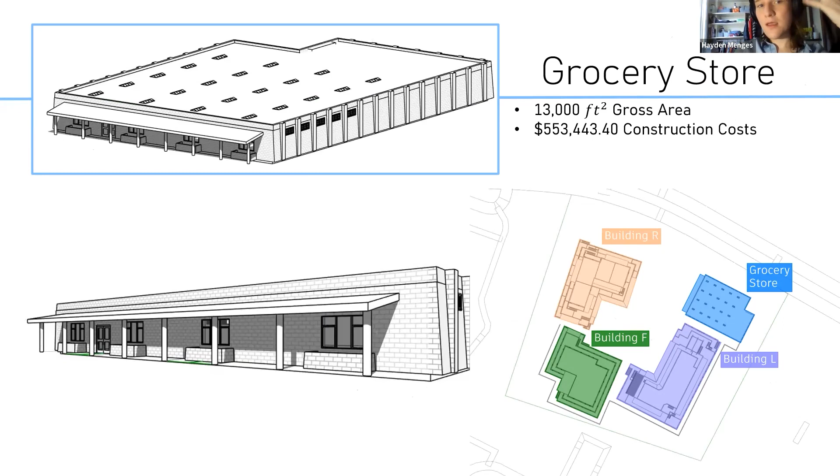The last building is the grocery store, which is a fairly decent sized building, about regular for a grocery store. We've subdivided it into a grocery store and a restaurant space to serve as a community hub where people can access food, but also come together to eat and meet and enjoy it. It's important to note that there are suburbs around this area, so it's not just the people on the property who'd be patronizing this, it's the whole area. The nearest grocery store is about 2 miles away, so this helps increase the walkability of all the nearby communities.

An architectural component I want to point out are these colonnade facades, which you see a lot in traditional Moroccan architecture, but they crop up all around the Mediterranean. They function to shade exterior walls, which does a lot to keep heat off of the building.

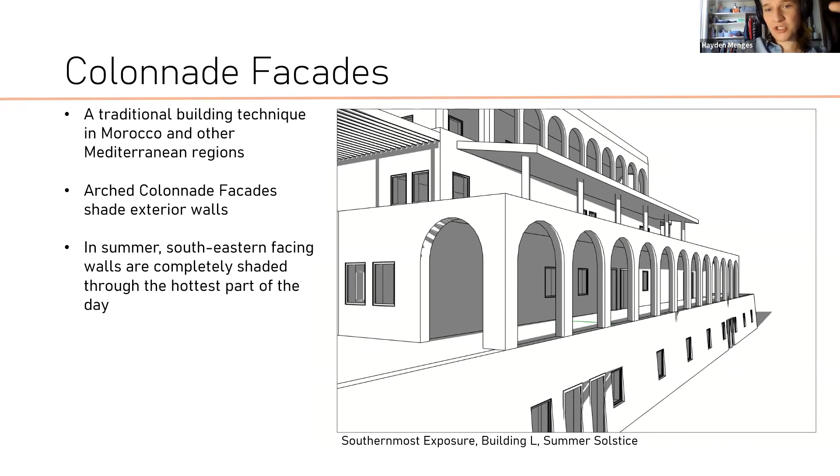You can see in this one that on the summer solstice, this southern wall only gets sun exposure for about an hour or two in the day, and even then it's maybe a third of the wall. So it's fairly efficient at reducing the cooling load on the building.

They also become less effective at cooling in the winter when the sun is lower, which means your building gets more heat when you need it and less heat when you don't need it. And to talk more about energy, let me introduce Chadi, who was in charge of the energy analysis component of this.

Thank you, Hayden. Considering this is an energy efficient housing project, a big concern was insulation. What we've decided to go with is structural insulated panels using Icynene. SIPs are a very good approach because it reduces the reliance on wooden studs, as they are much more structurally sound than other methods.

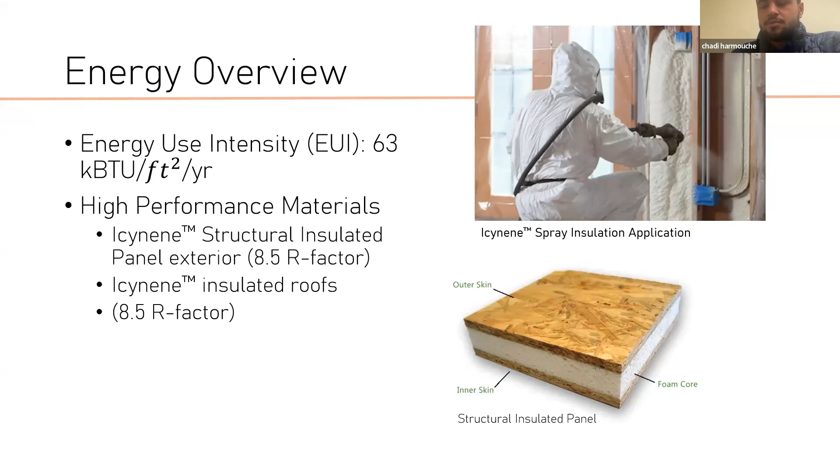Icynene is also 99% water, and it lacks all of the dangerous chemicals that some of the insulating materials in its family contain. Besides that, we have 63 kBTU per square foot per year use, making this a very efficient project. Can you move on, Heidi?

As mentioned previously, we have ample roof space, giving us the opportunity to build a very large solar farm. This solar farm in particular will be 36,000 square feet, providing 150% of the site's energy demand.

Most of this excess energy will be sold back to the grid, and this is an advantage to us as the local electricity company provides a 1-to-1 exchange ratio.

Besides that, we're also focusing on the little things to make this a truly energy or carbon neutral housing project. We're going to be using heat pumps instead of traditional ACs because they are much more efficient, and we're also going to be encouraging our tenants to use Energy Star rated appliances.

We're also going to be using light pipes and tunnels instead of traditional lighting to reduce energy use, and on-demand water heaters instead of centralized ones.

A big portion of this housing project is that we included no hallways. This means less space to be maintained and cleaned. It also means less space to be heated, cooled, and lit, making this a truly net or carbon neutral project.

Besides that, I'll be passing it over to my friend Astrid, who was involved with the interior and exterior design, and she will talk more about that.

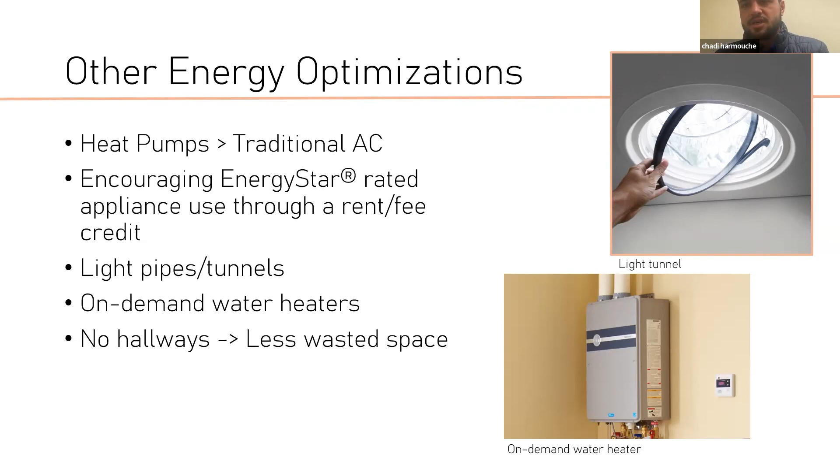Thanks, you're on mute, Astrid. Also, we're just about at time, so I'll give you another 30 seconds or so to wrap up.

All right, I just wanted to say that all the amenities are here for individual needs.

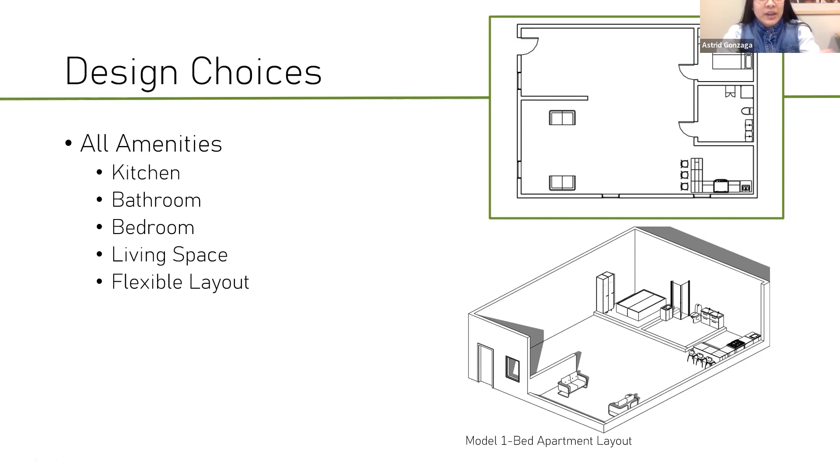Next slide, please. There's also the fact that we wanted to emphasize community and mental health through common walkway spaces and mixed apartment sizes throughout.

Next slide, please. And for exercise, we have a basketball court and also a grocery store for the promotion of diet and exercise, and we'll be close by to many major institutions in UNM.